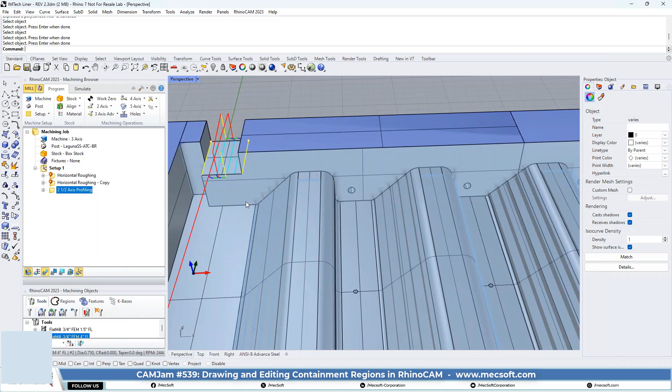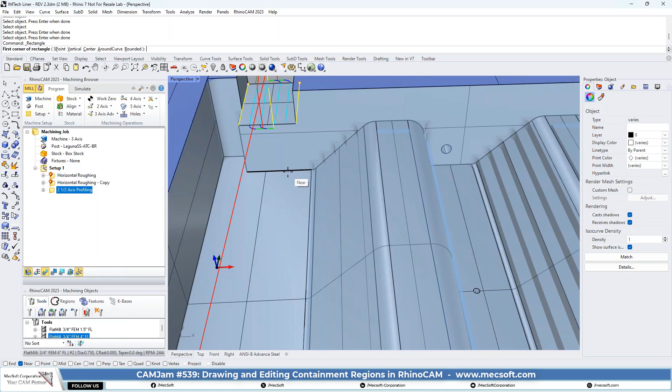I want to get all the way down here. So probably what I want to do is just draw a rectangle, right? And I want the tool to come out a little bit, say right to here, and then start its flow upwards. So I'm going to create just a rectangle, like say from here, and bring it all the way up here. I'm just going to fill it in a little bit.

It doesn't matter exactly where it's at, but let's turn the grid off, and we'll just do it right to here.

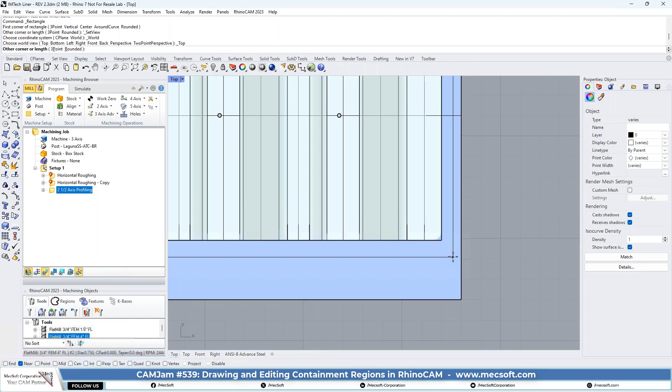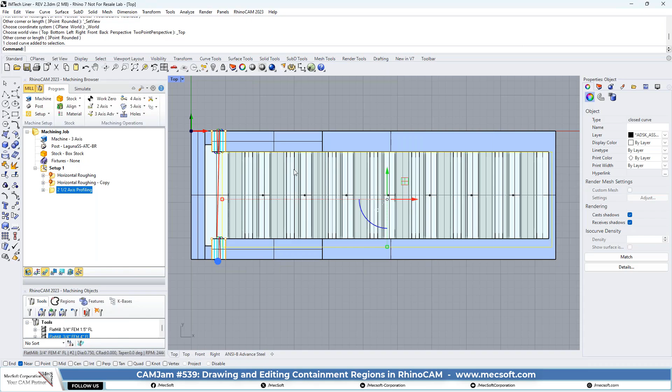The reason I did that is that I'm containing the finishing operation within this rectangle, and it doesn't matter how big the rectangle is on this side, that end, or that end, because it'll only go as far as the part goes anyway. Over here, I wanted it extended out a little bit, so we got a good finish down off of this first ramp.

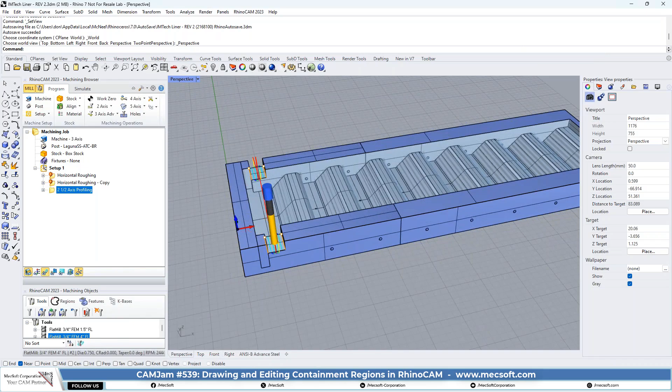So now you define that area. So you defined that area by doing that? Yes, I defined the area that we're gonna let it cut in. Okay, well let me think about that just a second.

Okay, I need to redefine that because I don't want it to overlap here, or the tool will go up into here. We don't want that. So let's go ahead and take that out, and let's redraw that.

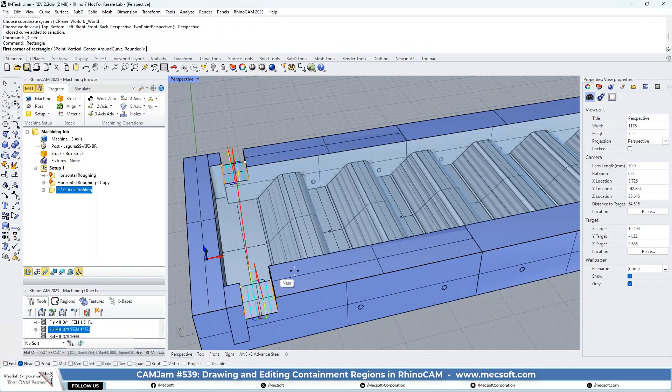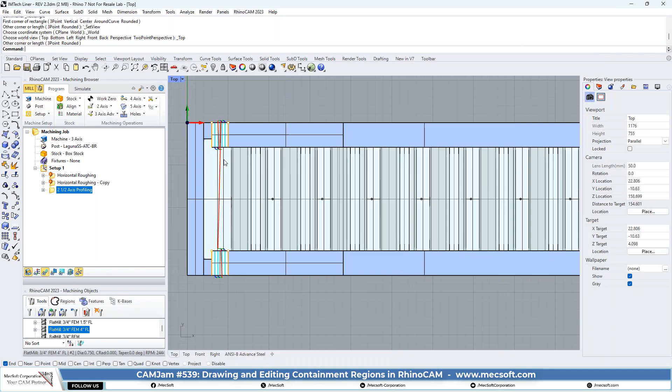And we're gonna go to the top view. We don't want to go to here. Hold on a second, not sure. Let's go offset. If I just offset this, hold on, let me go to the top view.

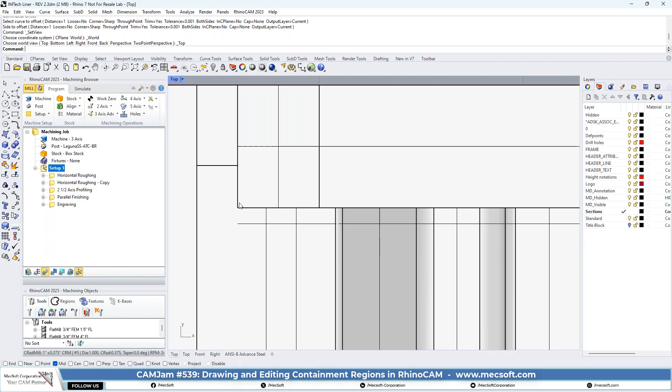Okay, this is already, I believe, offset 3/8. So let's move this inward another 1/8 of an inch. Same over here. Okay.

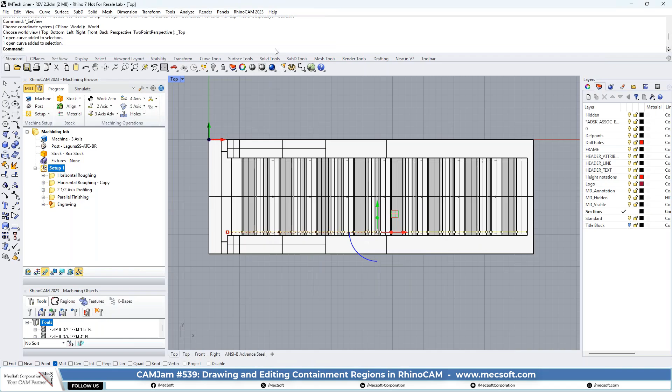So what I do now is I will create another rectangle from here and point, and I will redo the parallel finishing.

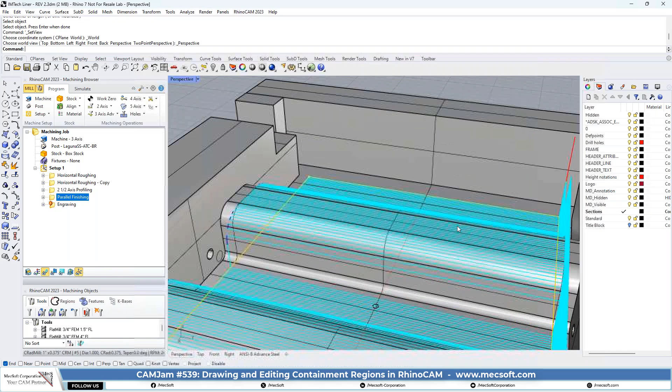So what you see now is that it doesn't want to roll up over this edge. Okay, sure. But I guess it still sees that the tool's diameter is still touching the wall, because this is a 1/2 inch width here.

So it actually goes up the wall. Now, if we don't want it to go up the wall, I can tweak that in a little bit further, but let's see what this looks like when it's simulated.

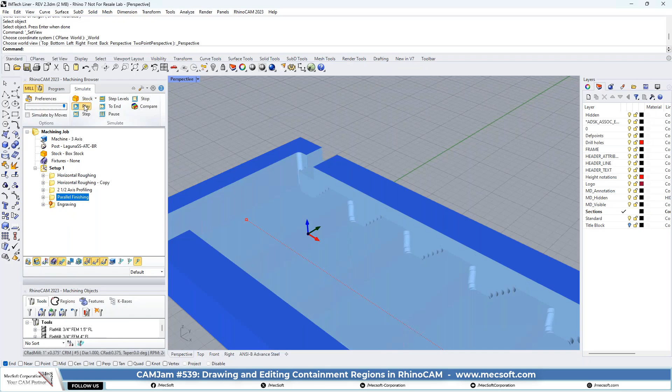Oh, is it gonna run? Oh, it started down here. Okay, so it's not long enough. We'll just let it go.